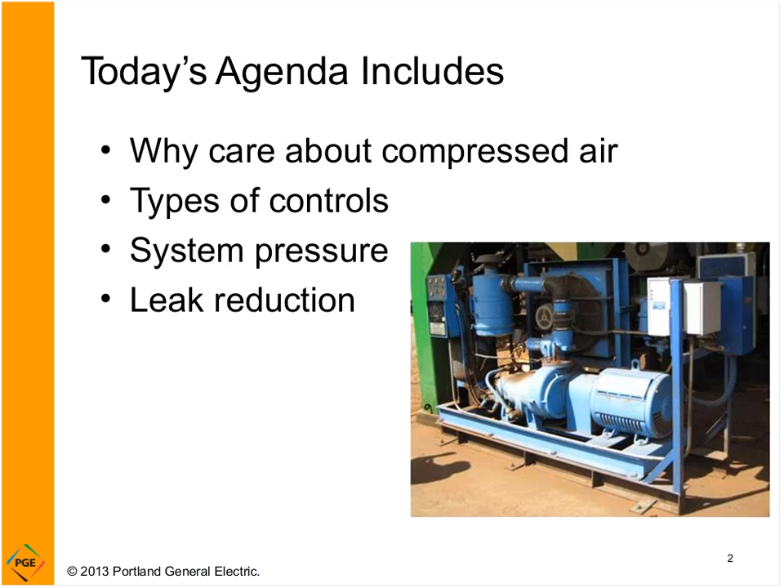All right, first of all, I'd like to know who you are. What kind of role do you play? Are you a facilities manager? Are you an end user? What kind of person are you relative to your plant? That'll help me understand who you are. So up in the upper left, click your pointer or whatever. Yeah, there we go, just put some blotches on there.

Got some consultants, facilities managers—myself, I'm more of a consultant kind of guy, and that's who I am for you today. I don't represent any products or anything like that; I'm purely here to help get your feet wet in this stuff. By the way, there's another class coming up on the 30th of this month, a half-day class where you can meet me in person if you want. Maybe I'll ask for your autographs, or I can try to sell mine.

At any rate, I see we have a good deal—a lot of consultants, excellent, and a facilities manager. You know, a facilities manager's number one thing is keep the plant running. Whatever we do with compressed air to try to make it better, if it causes headaches on production, then we've not done ourselves a good service. So we always keep that in mind—that's actually paramount, keeping the plant running. Okay, excellent. All right, well, let's move along.

Possible myths about compressed air—they were myths to me when I first came into this field and started studying at Oregon State University, really getting my head into this stuff and understanding what it's costing us, because it's certainly not free.

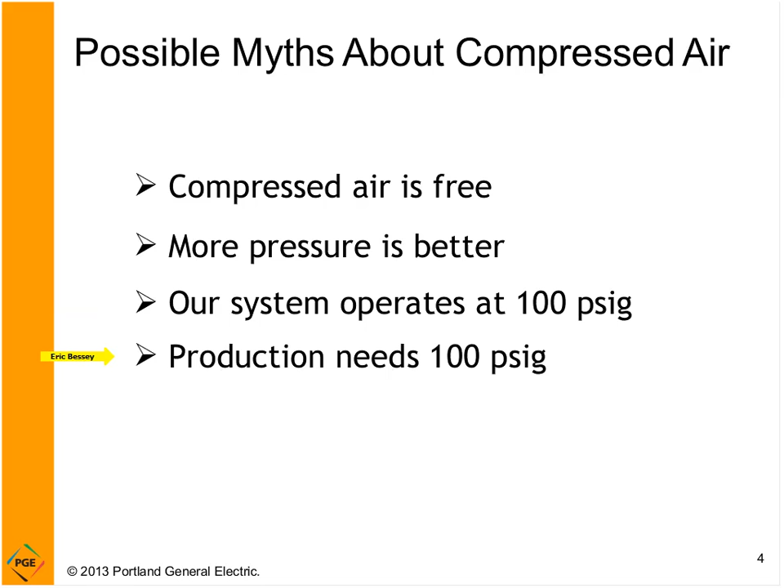Only about 12% of it is upfront cost of the actual purchase of the equipment and installation, and about another 12% for maintenance costs—changing the oil, the filters, making repairs and things like that. That's just typical maintenance; that wouldn't be for a compressor rebuild if it were to crash or something like that.

But if we take into account how much energy the compressor actually uses: a 100 horsepower compressor costs $30,000 a year based on 6,000 hours at 7 cents. That's amazing—6,000 hours is just a 24-hour, 5-day-a-week operation with weekends off. So your plant may actually operate more towards 8,760 or 8,400 hours per year if you operate on the weekends.

$30,000 over the first year. The cost of a new, plain Jane 100 horsepower compressor is going to be about $35,000 to $40,000. So in the first year alone, you've almost paid for that compressor. That gives you an idea about why that's such a big impact on our total cost over a 10-year lifespan.

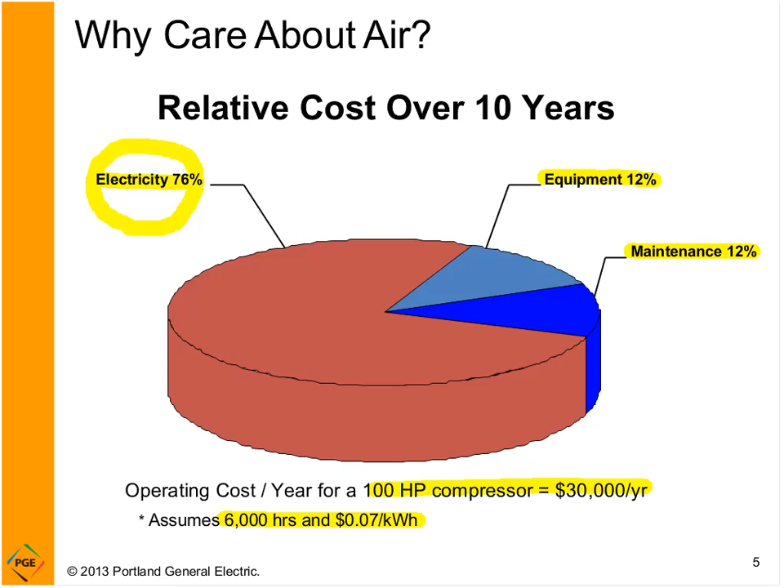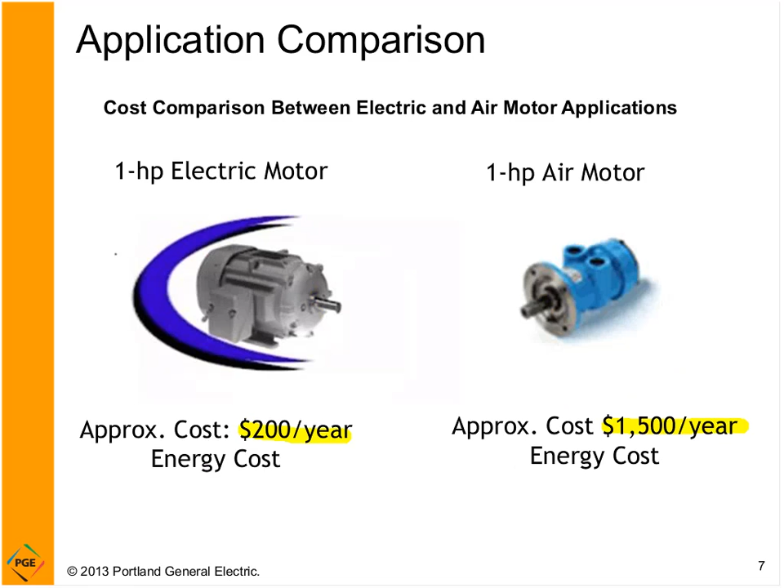Take a look at that: $200 per year for the electric motor versus $1,500 a year for the air motor. That's assuming the same operating hours and the same electrical rates for everything—about 7.5 times the cost to operate an air motor versus a direct electric motor. And hopefully you're thinking the obvious thing: you have to pay to compress the air. So first you're paying to compress the air, then you're using it—there's this middleman called compressing the air. And why is it so darn inefficient? Well, we'll take a look at that.

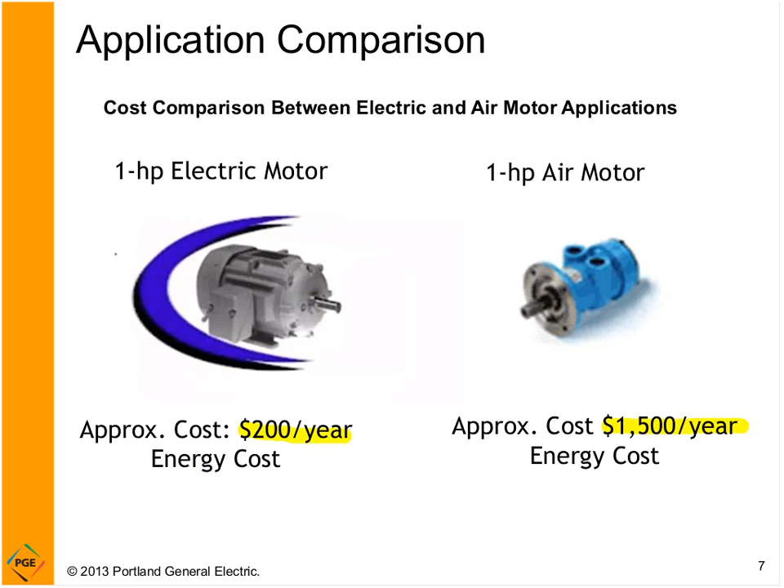Excellent, okay. And some of you consultants may not have compressors because you're consultants. You don't actually run a plant. And a start-stop, okay. Good for small compressors. We'll talk about each of these control types a little more.

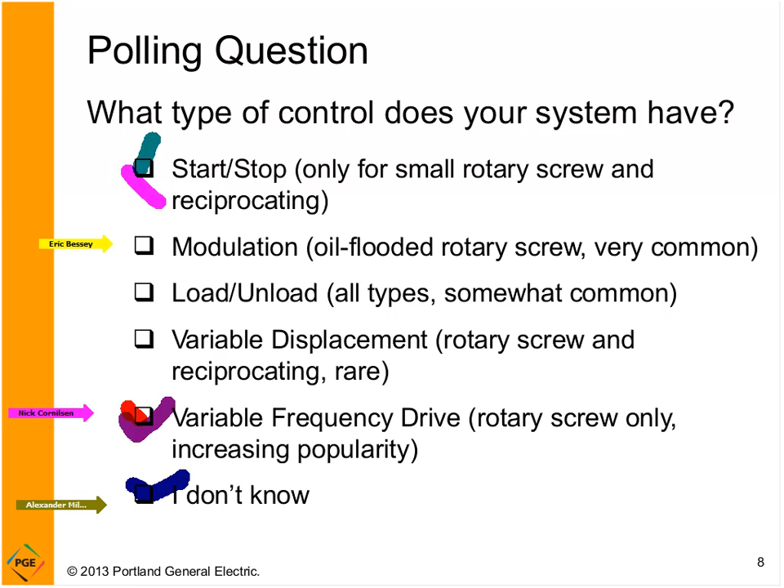The most common one with rotary screw compressors that had been prevalent throughout the 60s, 70s, and 80s, until we started caring about it, was this guy right here. That was the most popular, modulation. We'll talk about that, and I'll talk about why it's so inefficient, as you'll see. Okay. Let's talk a little bit about the different types of controls.

Start-stop. Okay, so this is like your little pancake compressor, or if you're a construction person and you're putting someone's hardwood floor in, you have this compressor sitting on the floor, and it starts and it runs and it pumps up to a pressure set point, and then it just simply shuts off. And then it waits until you use compressed air, so you use a few nails and it drops the pressure down, then it starts back up. Or this is just like a service station for your tire, just a start-stop.

They're really only good for smaller types of motors, because starting and stopping a motor is hard on the motor in and of itself, and particularly with big motors, they develop a lot of heat. So you maintenance guys out there that I saw, you won't want to start and stop a 100 horsepower motor very often at all. So it's really only suitable for small motors.

And then the most common one, or today it's very common, I won't say it's the most common today, but it was up until the early 90s, was just straight inlet modulation. Inlet throttling is simply restricting the air inlet to limit the amount of air that flows through the machine. It's just like your throttle on your car. So if you imagine a butterfly valve on the inlet of your car, as you operate the gas pedal, it opens and closes. That's exactly what happens with inlet modulation.

And it creates a vacuum at the inlet, and that's how it restricts it. Another way to do it would be to stuff a sock down it or put your hand over the inlet. It's all the same stuff. It's called throttling.

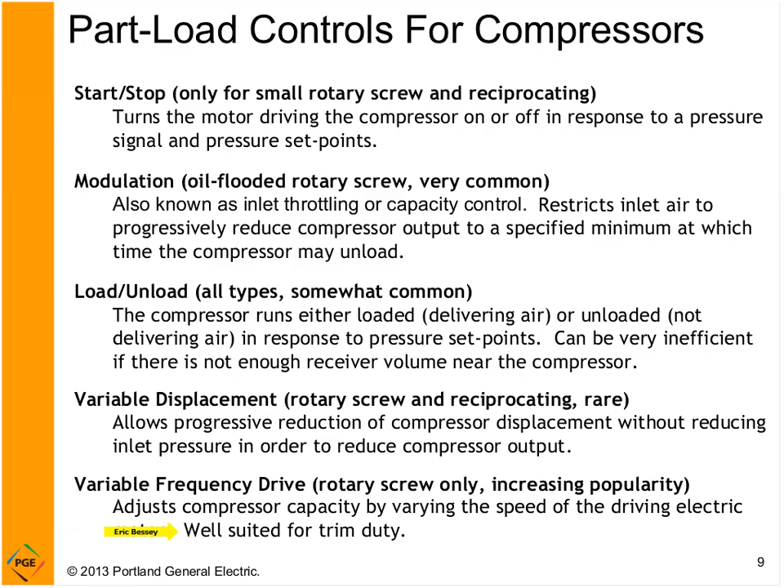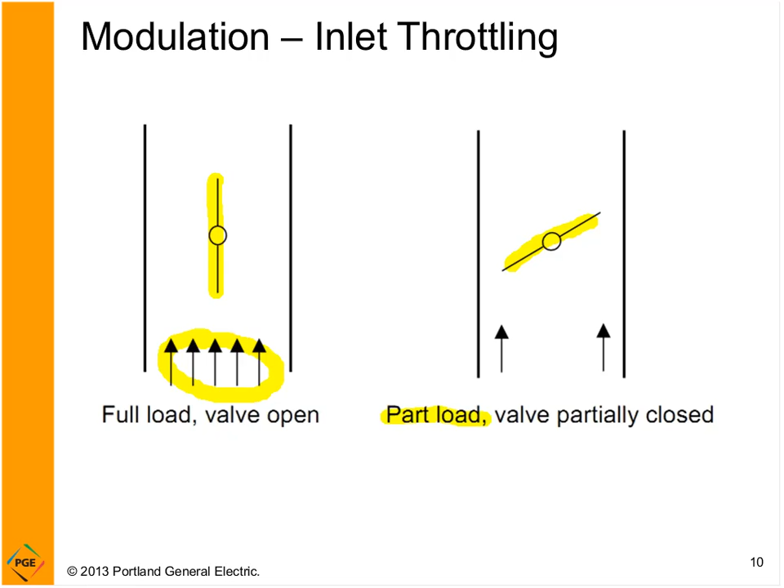In real life, we can take a look at this. Our air is entering through a filter. There's a filter up here. It goes through a throttle body, and right here is a shaft with that butterfly valve that I've been talking about. So it just moves back and forth, and for all you mechanics out there, there's just direct linkage, just like your carburetor linkage, right?

Yeah, everybody has carburetors nowadays. Well, your lawnmower still does.

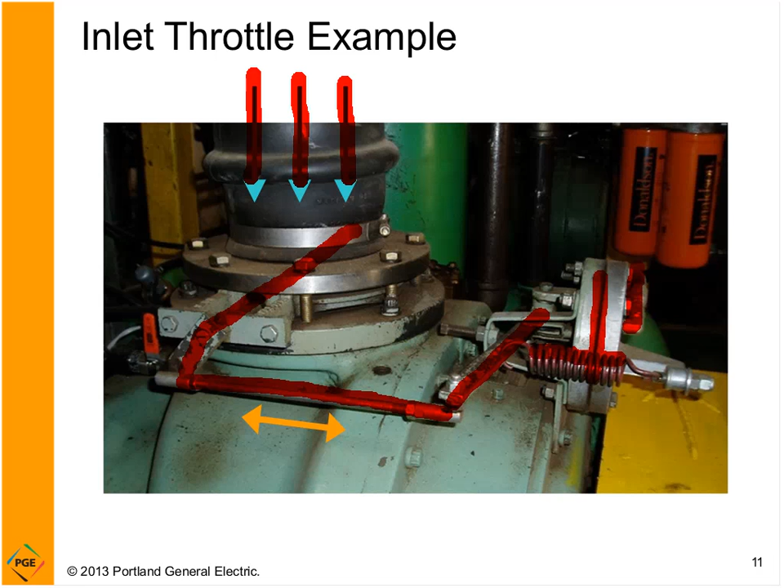So anyway, back and forth goes this rod. It's connected to another, we can call this a doohickey, but inside the doohickey is a diaphragm. It's an air diaphragm, and air pressure from downstream of the compressor or the oil sump, somewhere where it gets system pressure, feeds it, and it just simply moves this thing back and forth, and there you go. So it's kind of like a cheap cruise control on your car. It automatically adjusts the amount of flow to balance out the pressure downstream to keep the system full but not overfull. All right. So that's inlet throttle, and that's a really easy, simple one to understand.

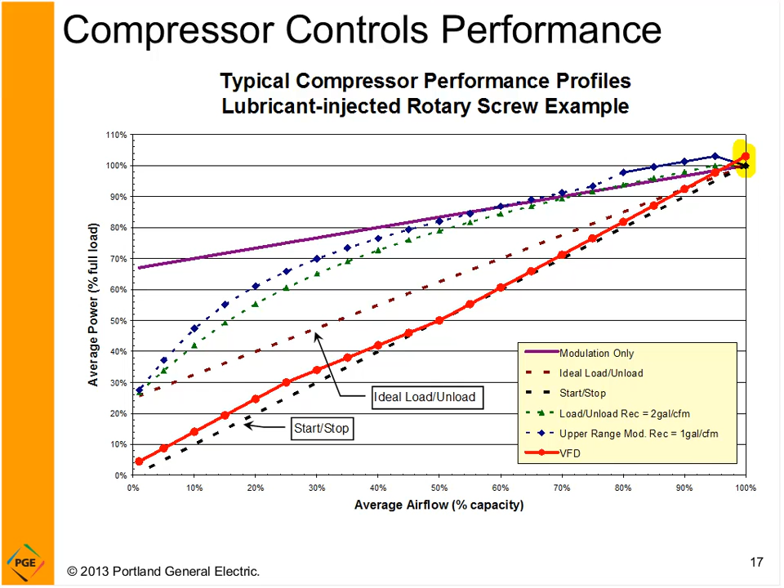Which leads down the path of, gosh, should I put VFDs on all my compressors or maybe just one or two of them? Because some compressors are going to be base loaded. So we can start to talk about system design a little bit. But these are pretty representative curves for the different types of controls that you can have on a compressor. Lubricant injected rotary screw, the most common compressor out there. We used to call it oil flooded. It's another term that's used for that.

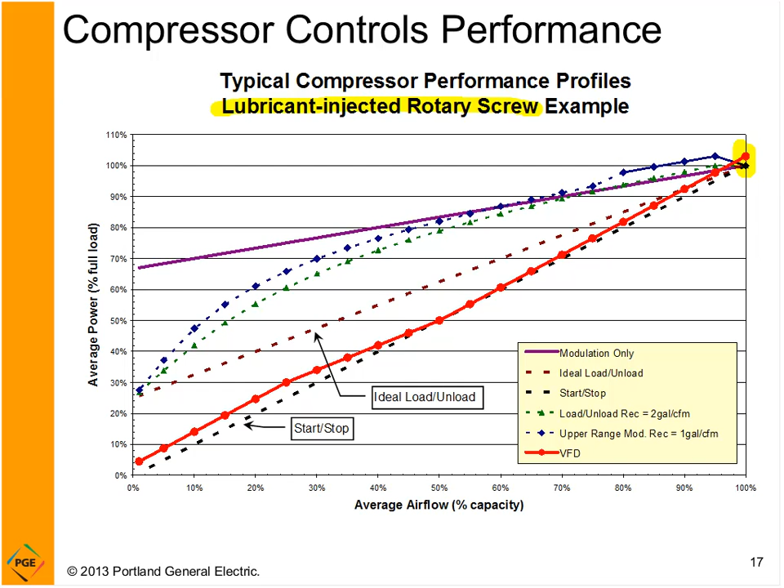So, where does the opportunity lie? It really lies in the part load performance of these compressors. Those were all those curves that I just showed you on the previous slide. In every system, at least one compressor will operate at part load. At least one does. Something has to have slack. If your plant required 1,000 CFM of compressed air at all times, never varying, you could purchase a compressor that exactly matched that load, and it would run at full load, and there would be no part load. But that's just simply not the case.

Leaks come and go. Production varies. People go to lunch, and the plant goes down. There's all these kinds of different things. So we know that the actual demand of the plant varies. So somebody has to vary. One of the compressors has to vary. And if we do so, we want to make sure that it's the most efficient way that we can and reliable. That's another key word, reliable. Must keep the plant running.

Inlet modulation should be avoided. It's just a very inefficient way to go. It used to be the simple, easiest thing to do in the past, and it was, but it's become a very, very expensive way to operate. So consider load/unload or VFD control for the trim compressor. Very, very important: load/unload in particular must have adequate storage. All compressed air systems should have a degree of storage, but particularly with load/unload controls, we really want to make sure that we have enough so the compressor doesn't short cycle. More on the 30th. All right.

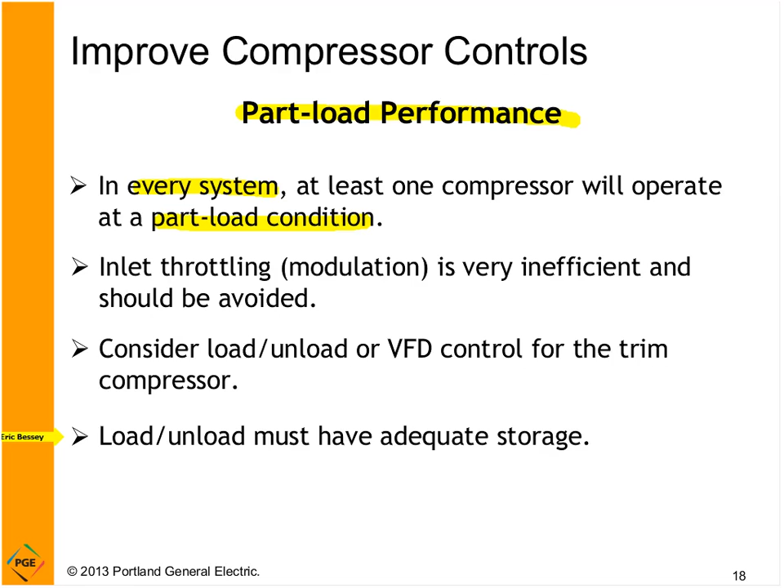Okay, so what kind of opportunity do we have? Let's say that we have an average load of 250 CFM. I have a 100 horsepower compressor. So a 100 horsepower compressor with a demand of 250 is right about 50%. So 250 out of a 500 CFM compressor. And if I measured the power on that compressor, it would require about 72 kilowatts. This is very, very typical.

Now, in reality, of course, the demand really swings, right? Sometimes it's high during peak production, and then we go to lunch and the demand's down here. So it's varying, but let's just say on average it's 250. Let's compare this to a variable frequency drive compressor.

All I did was take those curves that I showed you a couple slides ago with all those part load performance curves. It's not rocket science. I just took the flow and I plopped it right down on the curve. And you can see that there's a pretty impressive savings of 31 kilowatts, which is about $13,000 a year, based on our 6,000 operating hours and at 7 cents. So this is real stuff. It's not made up. This is a very common example.

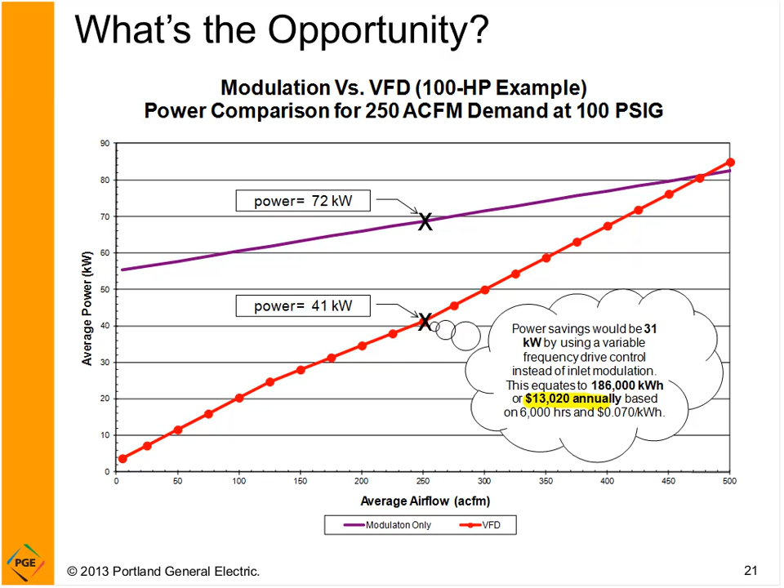So you look at that and you go, wow, okay, should I go out and buy a brand new compressor? Well, if your compressor is in very, very good shape and it's brand new, maybe you could retrofit it instead of just buying a new compressor. You'd want to work with your service provider, your compressed air distributor, make sure that that's okay. But in a lot of cases, you can actually retrofit a compressor with a drive and achieve this performance or close to it. So consider that. But you can see the numbers. I mean, that really kind of drives the point.

Okay, we've talked about controls, and then I promised to talk about pressure, and here we are. So grab your tool of choice and let me know what you think your compressor operates at. I'm going to go back to my old days when I didn't understand anything, and I have my system jacked up at over 120. Do I need that? I don't know, but that's where it's operating at.

I walked up to the compressed air system gauges, the gauges on the compressors out in the air receivers or wherever in the plant, and it's running up at 120. Now maybe I really need it, but that's not the point. The point is, do I know what it is? And some people don't know, and I can see that. Yeah, and there's a good answer. 100 to 120, very, very typical. Okay, what does pressure mean to you, and what does it mean to your wallet? Let's take a look at that.

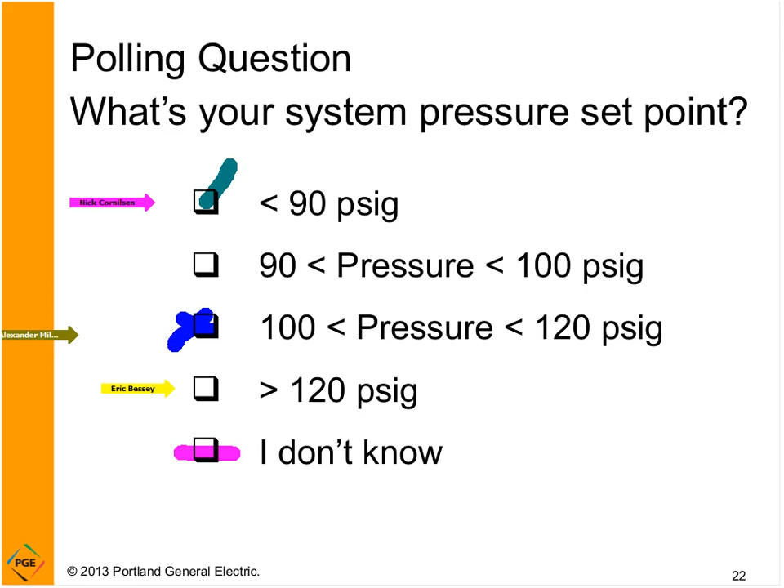Rule of thumb, and like all rules of thumb, there's always exceptions. These are just rules of thumb. But as a rule of thumb, for every PSI reduction in pressure, I can save about 0.5% of power. So a 10 PSI reduction is going to be about 5% savings, or $1,500 a year in the kind of examples we've been using so far. And it's just like when you're a kid pumping up your bicycle tire: the more air that was put into the tire and the pressure increased, it becomes harder and harder to pump up the tire. And that's the same thing. It's very simple that way. It's just resistance back.

But not only does it cost more energy to pump up to a higher pressure, there's something called artificial demand, which is really the amount of air that your system uses in excess of what you really need, solely because you have increased your pressure beyond what you really need. And I'll explain that a little bit, but suffice to say that for every PSI reduction, I can reduce this amount of demand by about 1%.

And it's kind of like your tire. So you go up to your neighbor who you've been arguing with over time, and he just doesn't see it your way, and you say, well, I'm going to let the air out of your tires. And at first you push in the little Schrader valve, and it hisses like crazy at first. And then as the air depletes from the tire, the hissing sound gets less and less. Your compressed air system is a big tire. You can think of it like that.

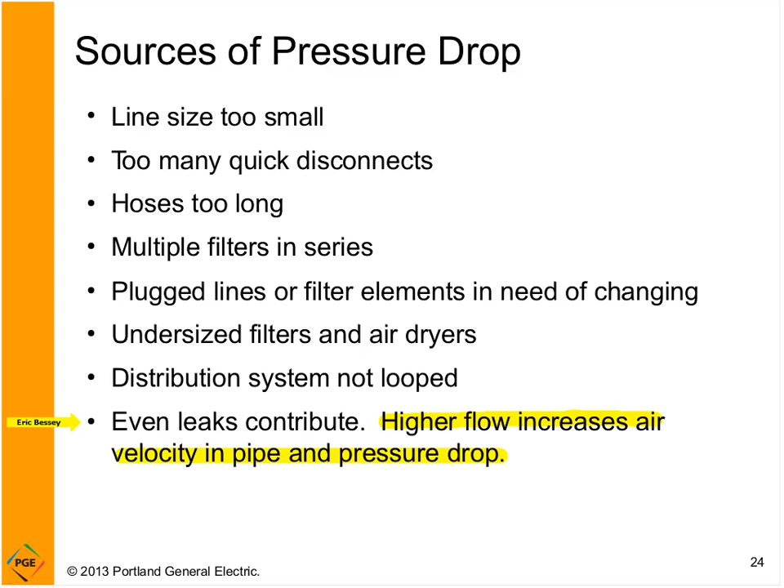Okay. Here's another artistic opportunity for you. Take a look at this. Grab your tools. Dark colors work well. So pick a highlighter, pick a dark color, circle or mark anything that you find interesting on this slide that might be contributing to a problem, or it could be a good thing, depending on your perspective.

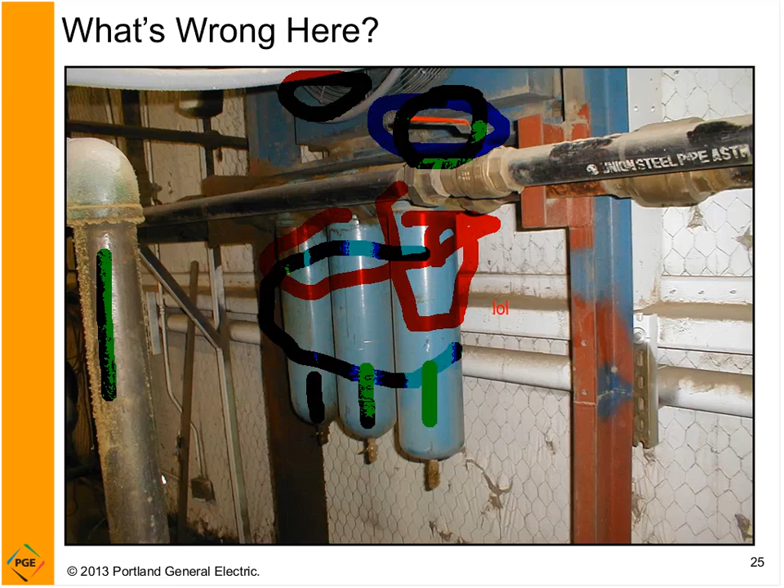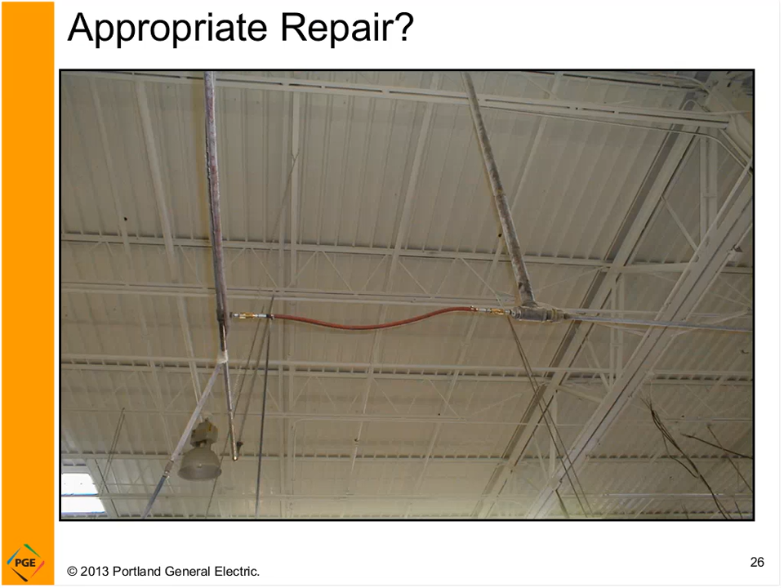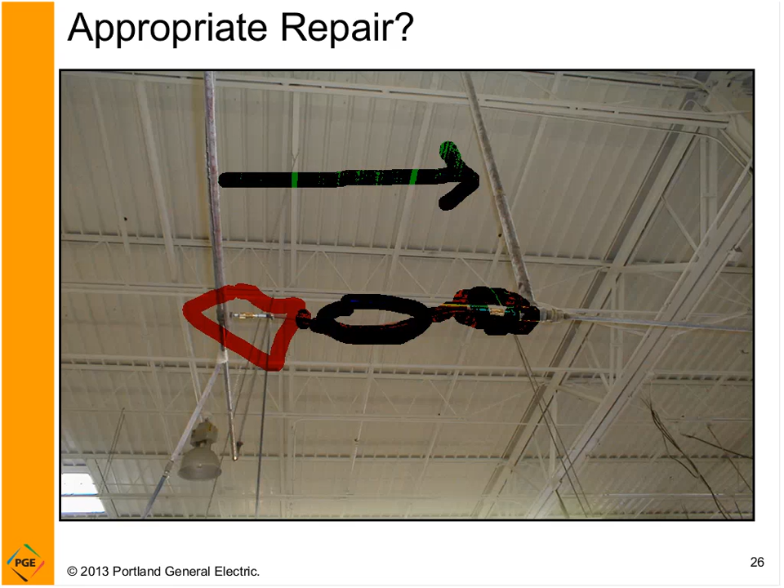So it looks like we have maybe a 3/8 or 1/4 inch rubber hose, all for the purpose of getting the air from here over to here. And that's our highway. So we have a little back alley, and we're trying to get rush hour through there, and it's just not working. Disconnects here can be restrictive, and if you buy the cheap ones, they're restrictive, and they eventually leak, and it's just not the best fix.

And what that's doing is starving the downstream side of air pressure, thereby requiring that we jack up the pressure on the supply side, and it hits my wallet, 0.5% per PSI, all because of that cheap, got-to-have-it-now fix.

It's a duct tape and baling wire type of fix, really. Should put a nice piece of 1-inch pipe in there, would be better.

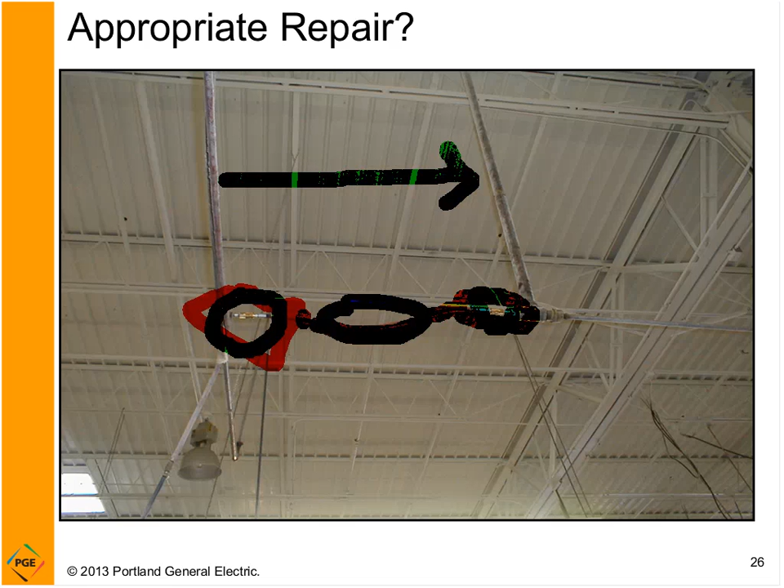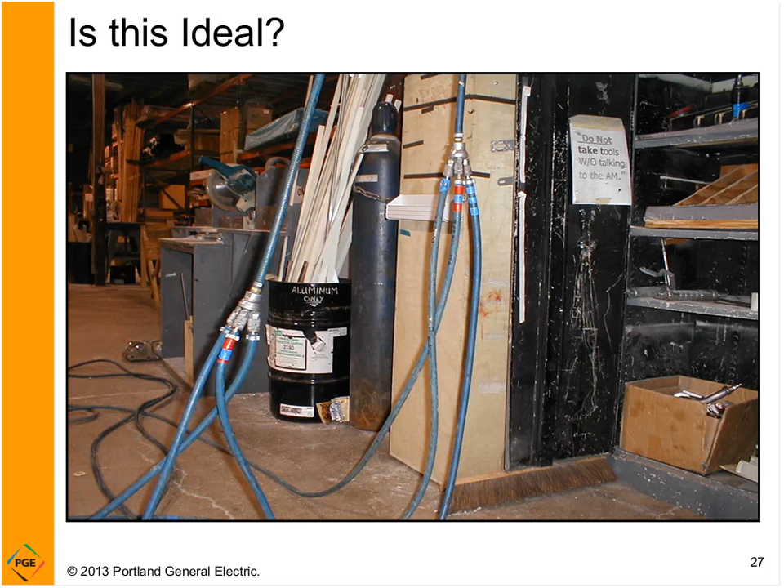Okay, what about here? Take a look. And again, this is a situation of I have to have it now. What can I do? I'm in a pinch. I've installed this table saw over here, or chop saw. It looks like chop saw. I've got a foot pedal operator.

Plug it in. So this is just like Christmas time when you plug in your Griswold lights, Christmas vacation time. Plug everything into one socket.

It's actually, pneumatic-wise, exactly the same as what happens when you try to plug too many things into your electric circuit. There's too much current. Electrical current is like a flow. The more flow you have, the more resistance or pressure drops. Same exact thing. And there we go.

And always put your tools back. Learned that from my dad the hard way.

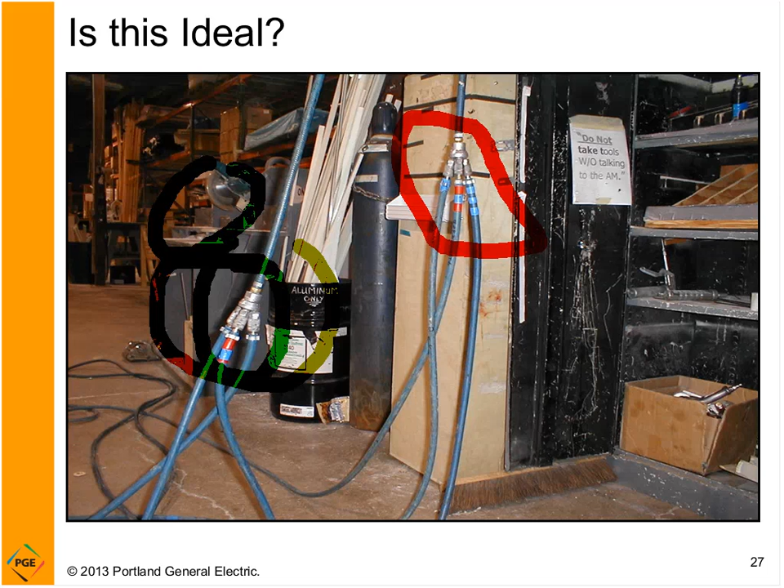Leaks. Polling question. How many leaks do you have? I feel kind of leaky. There we go, I got lots of leaks.

So I would encourage you to just go into your plant on a downtime, or maybe a quiet time if you have that opportunity, or even on the weekend, fire up the compressors and walk around and listen.

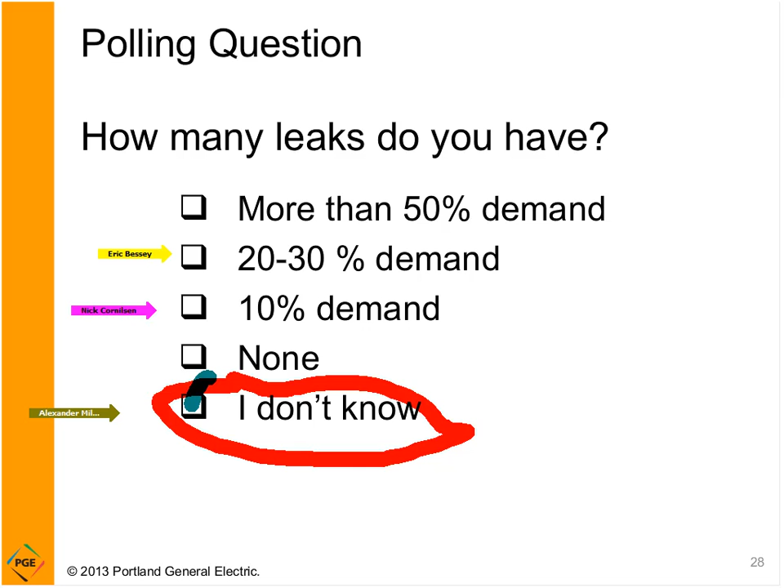Of a total plant demand, typical components of demand, only about half of the airflow actually goes to what I would call normal production, what's actually required by production. Half of the air you put goes towards that. About 10% of it, roughly, goes to this artificial demand thing.

Remember, systems leak more when they're pumped up higher than what I needed. This is just a typical thing. Your plant's going to vary, but it's just to give you a real typical idea. It can happen. There's my 30% leaks I talked about.

You know how regulators work. They're basically just a balancing act between the diaphragm, the upstream and downstream pressure. It has to have a bleed hole to relieve so the thing can open up when you need more air. Well, it just constantly leaks. A 16th-inch hole, that's not too uncommon.

$720 for that regulator just to be there. That adds up, and you can imagine all the little regulators you have.

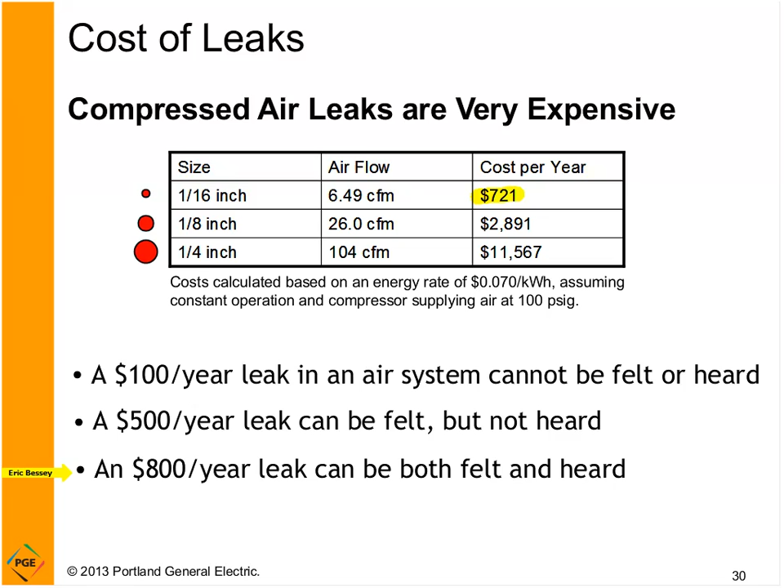Common leak areas: pipe joints, air hoses, worn packings. Here's a good one: open condensate traps and shutoff valves.

Maybe on the bottom of your air tank there was once upon a time a nice timed drain or a float type no-air-loss drain. But maintenance dollars are a little thin, so that device got neglected, and pretty soon it plugged up. Either it's stuck open or stuck closed. And if it's stuck closed, maybe you walked by and said, I'm just going to open up this little ball valve and crack it open. It doesn't take long for the moisture to evacuate. After that, it's all air.

It's all that expensive air - about $30,000 a year to generate compressed air for about 500 CFM or 100 horsepower. That's expensive. If you think about 500 CFM and go back to your leak table, you can see it doesn't take much to do that. It's really expensive stuff, and there's something we can do about it.

What about here? Okay, mark where you see an issue. Yep, right there, right? I do a pretty good job for you guys because I put all the things right in the middle - I put the elephant right in the middle of the room for you, so you don't have to look for it.

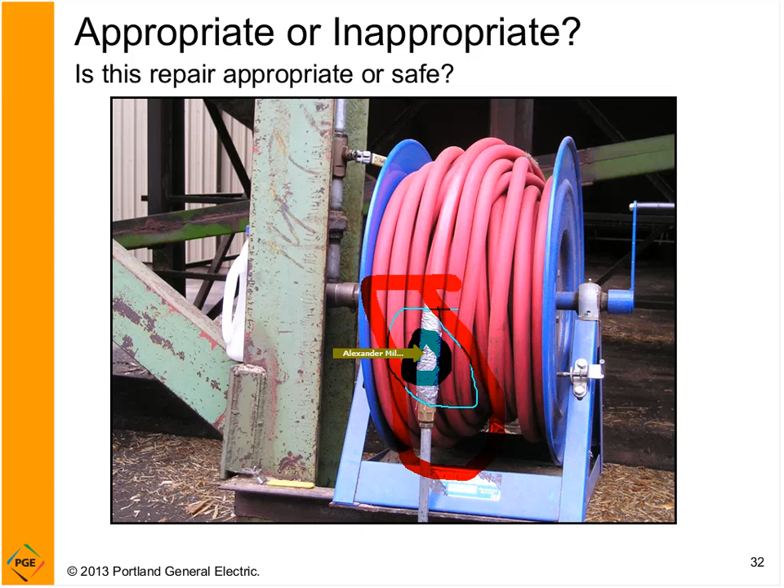Excellent, yeah, duct tape. Duct tape is neither particularly effective nor is it safe.

Something safety that I forgot to mention - if you're working with compressed air in the compressor room, please wear safety goggles because stuff can fly around with air. Wood chips can hit you. And plus, the compressors themselves are extremely noisy. You may not notice it, but if you're in a room for a couple hours, you'll have fatigue. It's just like being at a rock concert, and eventually it'll damage your hearing.

So wear ear protection. Here's a little valve to open and close, to turn the air on and off. So it's off. That's good. You can probably imagine what size of nozzle - that looks at least a half inch, probably three-quarter inch, looks like a one-inch bushed down to a three-quarter. And a lot of air can go through a three-quarter.

If you revert back to that screen before the leaks - an eighth-inch leak - and if you have a three-quarter, gosh, that's a lot of air. Of course, it's fun to blow stuff around. We'll talk about that.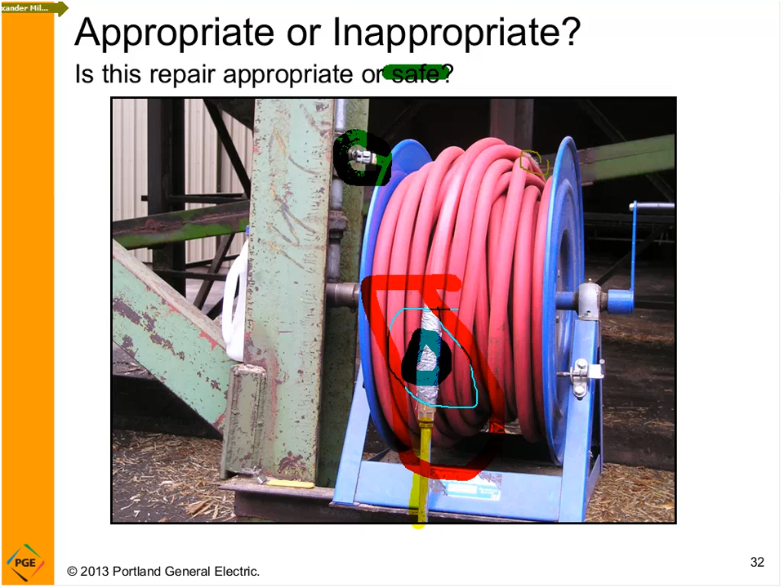Okay, what about here? You don't need to circle it, I'll circle it. What I have here is good old-fashioned radiator hose clamp, and they work like a charm for a while. After a while, just like it did in your old cars - nowadays they don't really use those hose clamps anymore, but if you have an older car that does, eventually the sharp edges work their way into the rubber, and eventually you have an aneurysm and eventually a leak.

So they don't work particularly well. What you should do is install those crimped-on type clamps that have the rounded edges that won't dig into the pipe. A little more expensive, takes a little more to install, but you won't have a leak. And I think by now, hopefully you've seen that a little prevention and money up front will save lots of money down the road in terms of leaks especially.

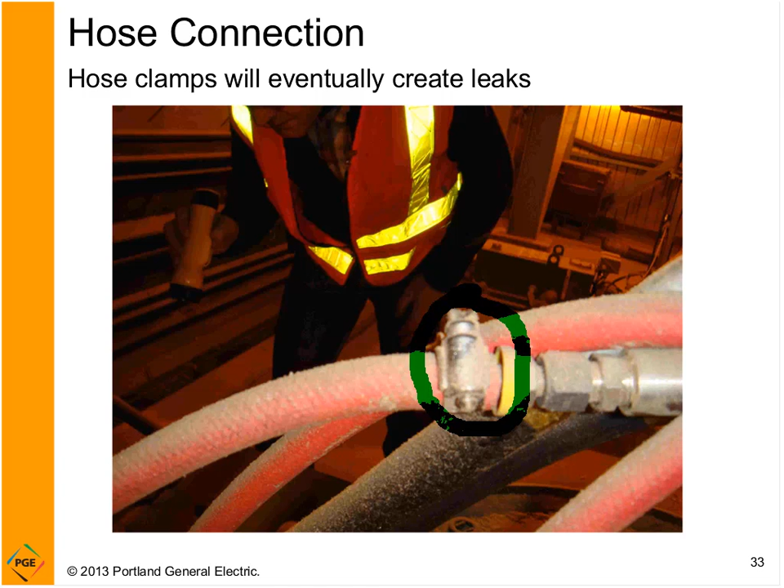Okay, what do we got next here? Aha, open blowing. This is a good topic, one of our favorites, and it's used for cleanup. I worked at a plywood mill for a few summers in college, and it wasn't compressed air I used - it was water from the fire hydrant, or from the mill pond actually, that we pumped, to keep the dust down because the neighbors were complaining about the dust in the lot. So I spent, I don't know, a week one time just hosing down the whole thing, which was really an exercise in futility.

Same thing with compressed air - when you blow particles around, could you imagine using a blower in your house to clean up your kitchen?

It's just a tornado - it's clean right where you blew it, but then the stuff goes into another corner. It's still there, so now you go to that corner and blow, and all you end up doing is just blowing stuff around. You're not really removing the material, you're just blowing it around. But I can understand, it's kind of a quick fix.

So there we go, it's about a half inch, and lots of horsepower worth of air going through that when it's being used.

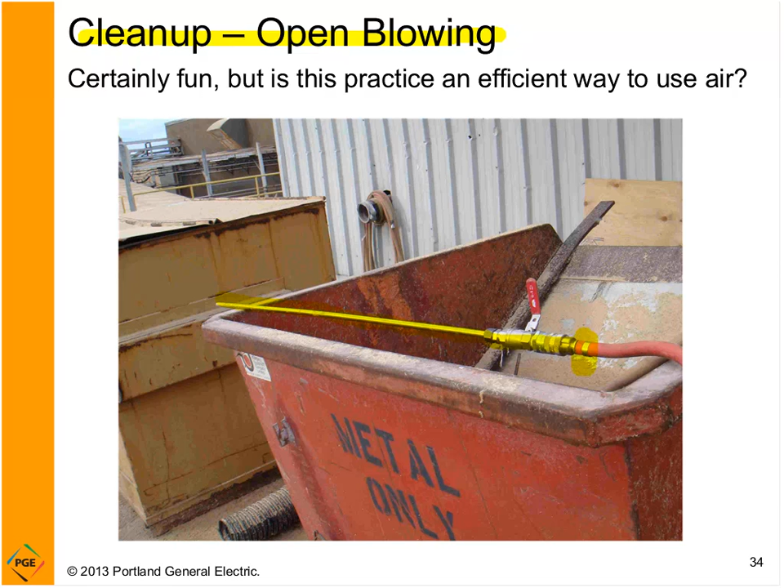Oh, look at this - this looks like one of those maybe crimped-on type connectors. That's actually a good thing right there. So out of all this, at least I see a good connection piece. That does not look like a radiator clamp - first time I've noticed that.

Okay, use a broom. In the mill it was, if you've got time to lean, you've got time to clean. So when the dry chain, green chain, or planer chain is down, grab a broom. This gentleman is probably pushing this stuff off into a collection bin, where we can actually remove the material instead of just blowing it around. Once we put it into a collection bin, it can be sold or burned for hog fuel or something like that, so there's a real benefit compared to just blowing it around. Plus he's getting good exercise.

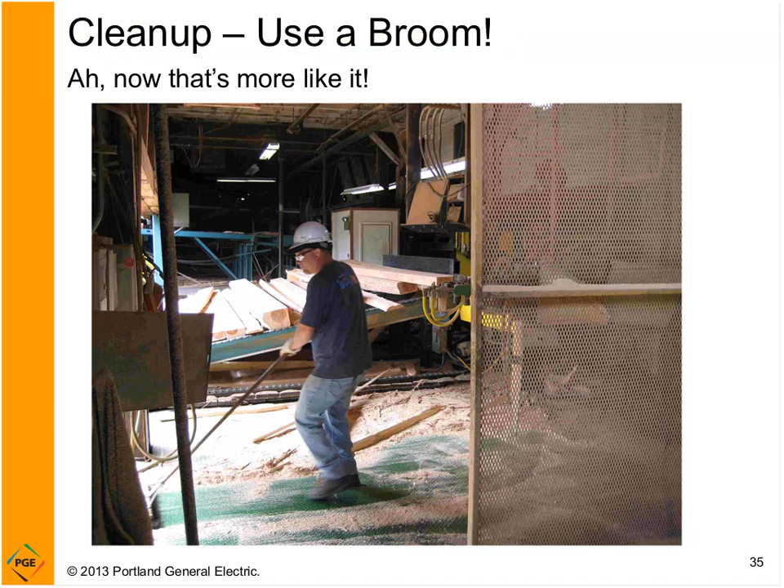All right, that concludes the basics. I really encourage you to attend the October 30th class, because we're going to get a lot more detail about these things, and you can even carry your education beyond that. In the good half-day class we'll go over each one of these in much more detail.

Part load - at least one compressor has to part load. I hope you agree with that; if not, we can talk about it. But suffice to say, if it does, variable speed drive is perhaps the best option. Not always the best option, but just about all the time it is. Great savings can be had.

Remember, inlet modulation is the poorest way to go.

Pressure - lower is better, and I mean lower is better from an economic standpoint. Production-wise, if you need a certain amount of air pressure to keep the plant running, that's where you're going to operate. I'm not suggesting you lower the pressure beyond what you need. But if you could just drop that pressure down by a PSI per week and start to notice if anything in the plant has quality issues, then dial it back in. That's a really good way to see where your plant needs to be. Maybe add 5 PSI on top of that for safety. For every PSI reduction, you could save 0.5% of energy. Not only that, but maintenance can drop too - the less pressure I'm slamming cylinders with, the less wear and tear on those. And leaks leak less, of course, and other things that use air can have a little longer maintenance life out of them.

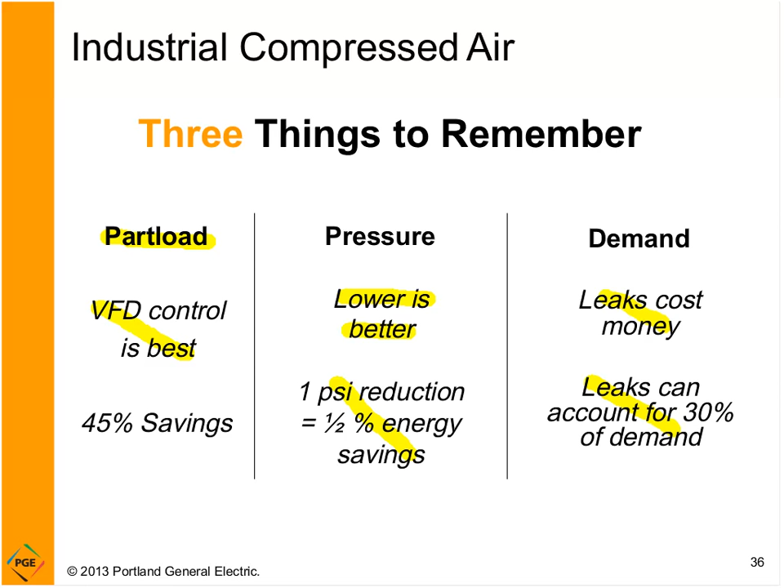Okay, next steps - locate your compressors. Where are they? And I don't mean to be facetious, that's true. A lot of plants really don't know where they are, because compressors are kind of neglected in the sense that they're just in the background, faithfully keeping air pressure in the pipe. The maintenance operator walks around, does his maintenance, he knows about them, but he's probably not thinking so much about the energy.

Of course, maybe if some of those end users and operators are here on this call today, you've now gained a little bit of appreciation for the energy. But if you're an energy manager or a consultant, you have to go find them. So go to your plant, find your compressors, and see if you can determine what kind of control type it has.

And you can get help from the Energy Trust of Oregon, or perhaps even your compressor vendor can help explain what type of controls you have. See where the compressors are set up for pressure. How are they operating? What are they doing? Talk to the compressor operator, so there's somebody there that's faithfully making sure that the compressors are operating and delivering air, because the number one thing is production.

No one's ever been fired for having too much compressed air, but if you do not have enough compressed air and production halts, then we're going to start to talk about that.